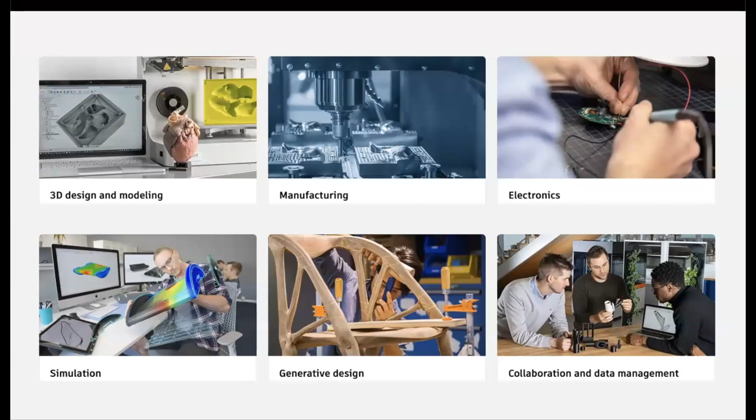A common question I get is why would we use Fusion, or why would I transition my students from Tinkercad to Fusion? That's a really great question. Fusion is a full-fledged professional, industry standard CAD program, meaning that the same types of careers your students might be entering one day, they can gain those skills in Fusion 360.

It is extremely real world. We talked last week about creating technical drawings, making complex 3D models, and getting into manufacturing as if we were considering an engineering career. So by teaching our students Fusion, we're really teaching them those real world skills at an earlier level and empowering them to create just about anything.

It's a really powerful program for students looking to enter these different fields as they learn all these different skills. It's so capable that they can bring their ideas to life as if it was a real product or system. One great way to do that is through Assemblies, which is tonight's theme.

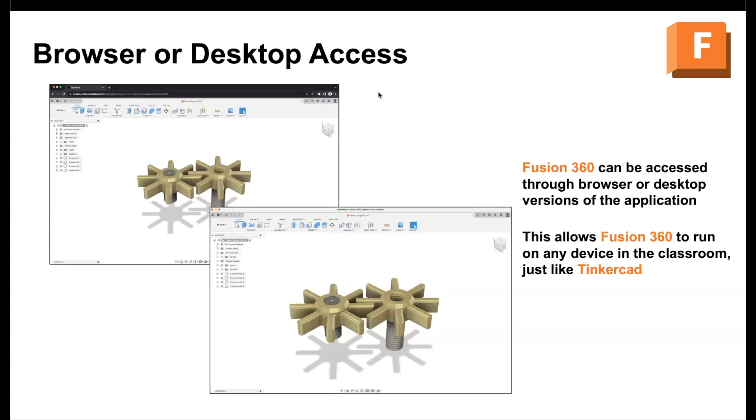I also want to answer a couple questions I see popping up. Yes, you can access Fusion in the browser, just like Tinkercad. There's a desktop app for Windows or Apple Mac computers, but you can also load Fusion in the Chrome browser on a Chromebook, just like you would with Tinkercad. So whatever device you have probably works with Fusion in your classroom. Fusion's also free for students and educators.

You do need to create an Autodesk account, but it's free to do that for education, which gives you unlimited access as an educator or for your students. There are different age limitations depending on where you are - for example, students would have to be 13 or older in the United States, and that varies a bit region to region, but it's completely free for students and educators to create an account and start working with Fusion.

There's also something called Fusion 360 Teams. This is cloud-based, meaning your students' designs are saved to a cloud. It also means it's super easy for you to make a class within Fusion Teams and have your students join that class so you can see their designs and check on their work. Students can share designs between group members and collaborate within a single document. It's very powerful in the classroom setting, and that's included with the account that you create.

Another common question, which I'll demonstrate when I get live and hands-on with Fusion, is that when you're getting started, the controls are slightly different if you're coming from Tinkercad to Fusion 360. But Fusion 360 is completely customizable - you can customize the way the mouse works, the way clicking works, the way selection and zooming works to mimic what you're familiar with in Tinkercad. That's something I know myself, and the whole Tinkercad team does, is the first thing that makes Fusion feel more like Tinkercad.

So it's a bit more comfortable for us to transition to this program. That's a super handy feature. I see Randy just dropped a blog post into the chat showing how to do that.

You'll notice that in the slideshow, there are some hyperlinks to different resources I'll be talking about throughout the night, so you'll be able to go back and review all these things as well.

So, designing multi-part assemblies, what does that actually mean? It's one thing to design a single part, like last webinar I was talking about designing a 3D printed mug or jar. But a more complex real-world design involves making parts that actually assemble, fit, lock together, rotate, and slide.

We love to use Fusion for this because not only can you make super complex designs, you can simulate how they would actually be constructed. We can see if they're going to move as they should, and we can test our models in Fusion 360, which brings in those real-world complex concepts.

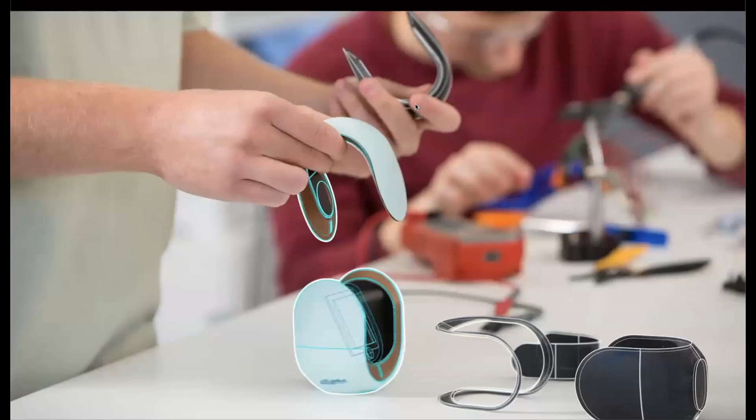That's exactly what we're going over in our demo tonight through a few different projects and scenarios. This will empower your students to plan and prototype their designs through an iterative process. Instead of just 3D printing and realizing it doesn't fit, we can do a lot of this testing in Fusion.

A real company would simulate everything digitally before they go and manufacture it. So it goes back to why Fusion lets us bring those real-world concepts right into the classroom.

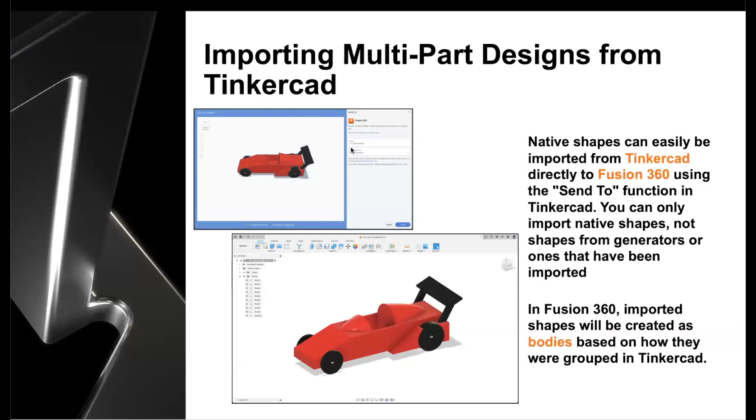The first thing I want to show you is how to actually start in Tinkercad, since so many of you from the poll are coming from Tinkercad. It's super easy and a lot of fun to bring your Tinkercad designs into Fusion 360.

What you're looking at right now is a toy car I have in my Tinkercad design. It's got multiple parts, and I want to show you how this is grouped together, because a lot of these things will import directly into Fusion, which is great.

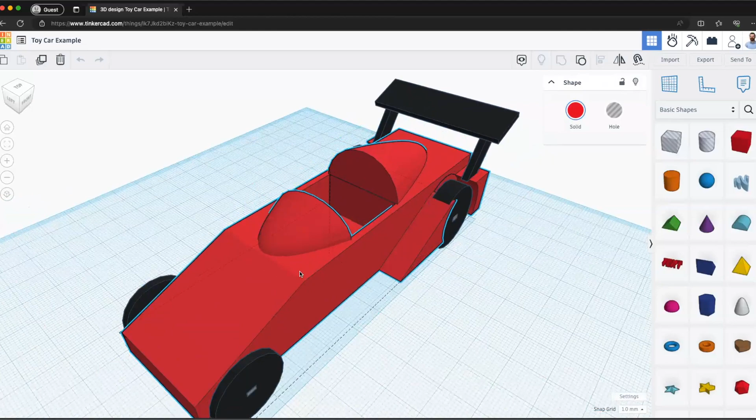This car body in red is a single part. This wheel and axle - the wheels are individual parts, the axle is an individual part, and this spoiler fin on the back is also an individual part. So I have multiple parts here that aren't grouped together, and that will be brought into Fusion just as I have it designed, colors and everything.

To bring something into Fusion is very easy to do. You can click the Send To button or the Export button - I believe there's a Fusion option under both. There's also a nice button to hit 'Take Your Design Further with Fusion 360.'

When you click on this, you'll have a number of options. First, keep in mind - and it does warn you about this - only native parts will be imported, meaning all of the basic shapes will be imported, including the scribble tool.

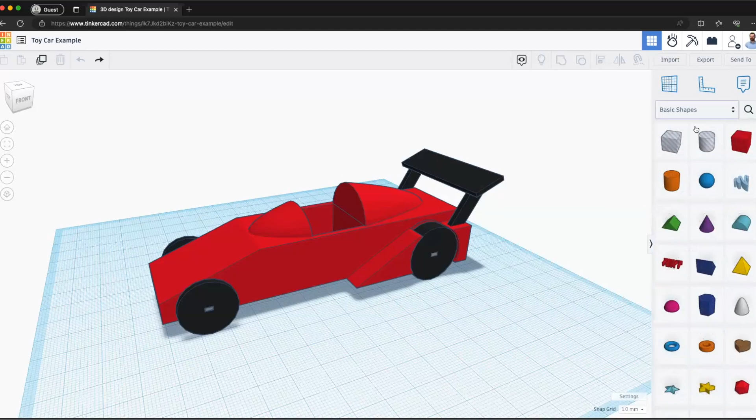But any shape generators or custom shapes cannot be brought into Fusion 360. You can bring in any basic shapes created with our basic panel, but other shapes will not be imported.

The other thing you might want to do is connect your Tinkercad and Fusion 360 account. I don't have a team listed for the account I'm signed in with now, but if I were a student part of your class, a Fusion 360 team would appear right here, and I could send it directly to that class.

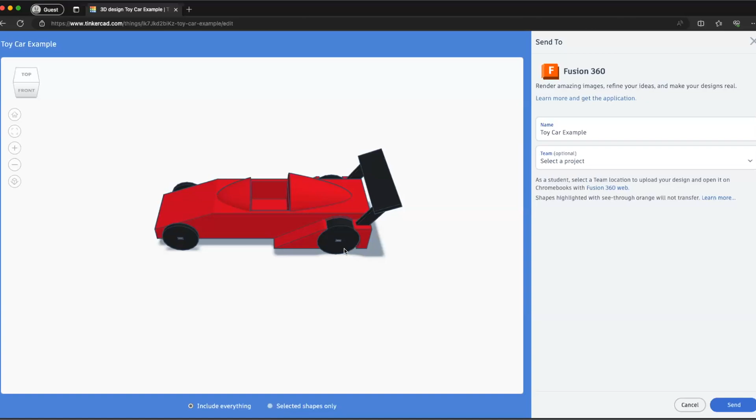Alternatively, I can download this and open it up directly in Fusion, and if I wanted to, I can export every single thing or only a selected shape. So if there were things in my design I didn't want to bring over, you have a lot of flexibility. Give me one moment, I'll show you as I bring up Fusion.

We have our toy car. It comes over exactly in terms of grouping as it was in Tinkercad, as well as colors - you can see it's still red, black, and gray. In Fusion, I have all of these bodies, and these bodies are those parts.

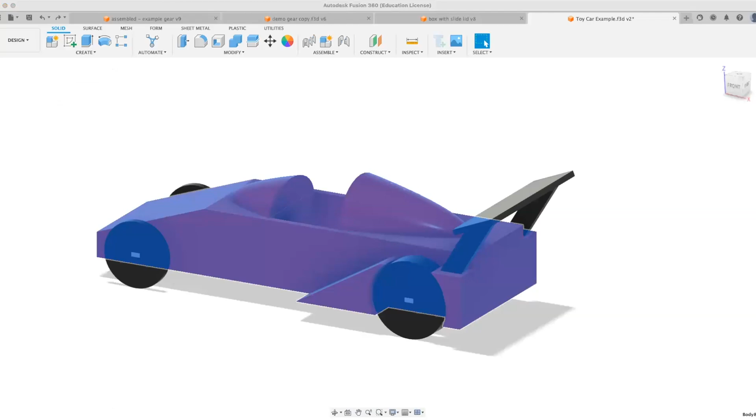So you can notice I can click on these different bodies here, and I can highlight the individual parts. So whatever wasn't grouped or was grouped came over as solid parts in Fusion, which is really cool. And there's another couple great things, and we talked about this in our last webinar about why you might want to bring your designs into Fusion.

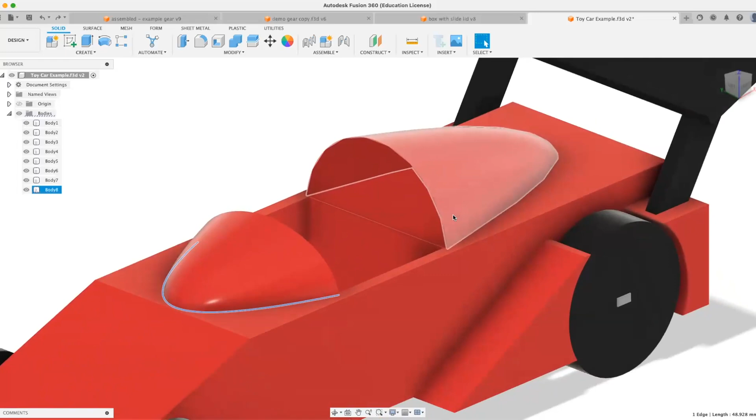You'll notice that this design automatically looks a little bit smoother, right? So our mesh models are merged into solid shapes, which means I can actually click on edges of my design. Everything's a bit smoother and a bit more refined just because I brought it into Fusion 360, which kind of automatically reconfigures and re-renders all of your parts. So it makes it nice and smooth. And it gives you some really great customizability features.

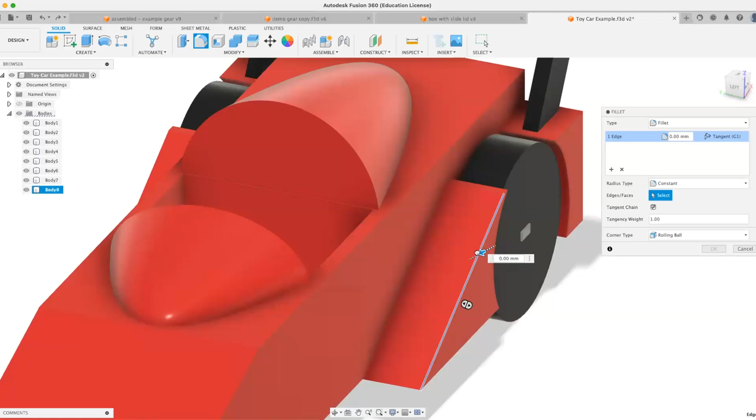Like, for example, if I wanted to get rid of some of these rough edges, I could just grab my fillet tool and I could click on an edge here and round it over and enhance my design as I go. And I can actually do that to a number of edges. Let me click on some edges here, and I can customize my car a little bit.

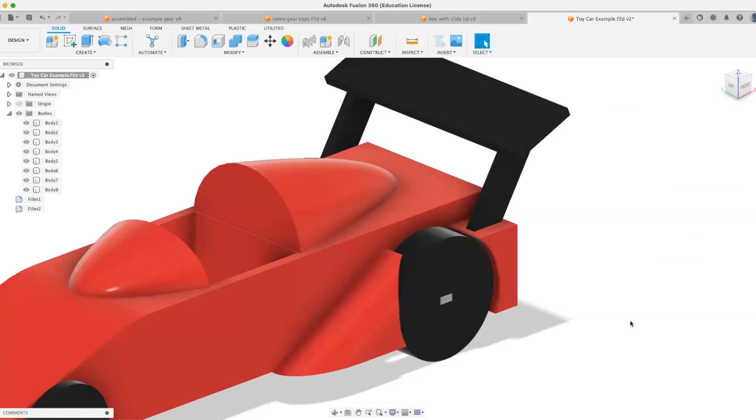Maybe we'll click on this edge and just sort of smooth things over as I want to enhance my design that I brought over. So this car was designed in Tinkercad, but I can work with Fusion 360 to customize it, enhance it, and of course work with assemblies. So lots of really great features just by importing your design over here, which is super cool.

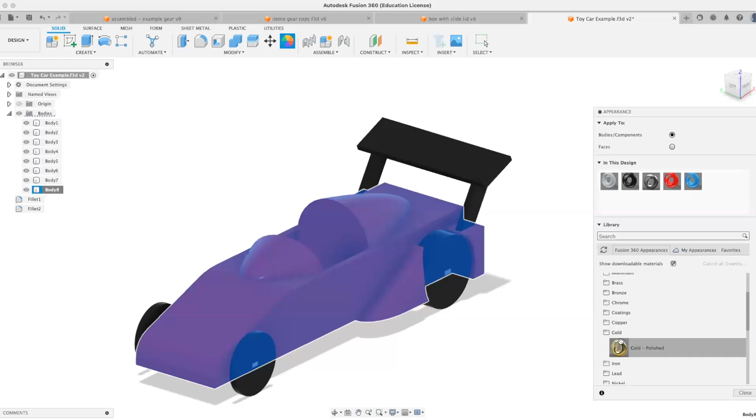I mentioned that you can also customize and change colors and things. So all of these shapes that we have can be customized. So for example, if I find my car body shape, I can right click this and I can edit the appearance. And Fusion has a number of materials kind of built in. So for example, I might want to actually go to my metal category and maybe go to gold and set my car to be gold, which is of course super fun.

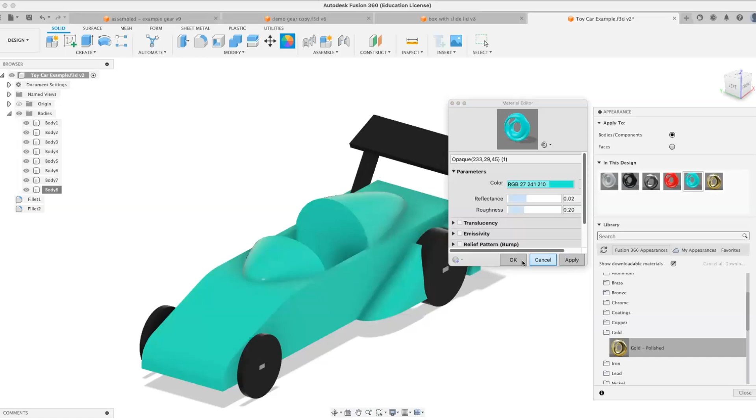Or I can actually get very specific as I mix my colors and things. So you have a lot of customizability in how you actually want to make your models appear in Fusion as well, which is also super fun. So lots of great customizability as you bring your models in.

Now, when you bring a Tinkercad design in, this timeline isn't shown by default, but we can actually right-click our model up here in the browser and click Design, Capture Design History. And that means that everything I do moving forward will show on my timeline. And the benefit of that is it's super easy for me to modify and go back and adjust things. So let me add, for example, a chamfer on the outer edges of my wheels real quick.

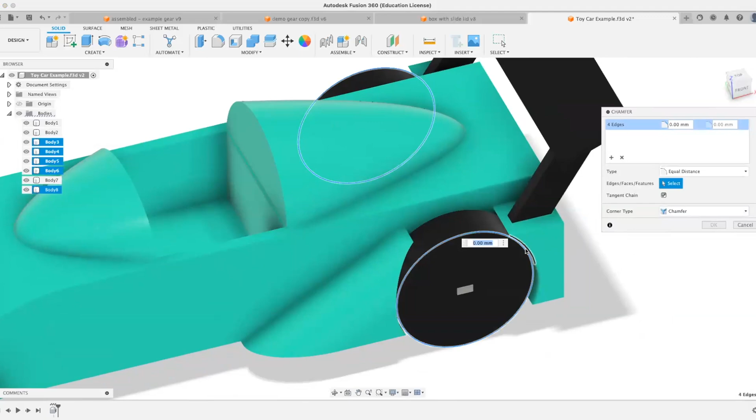Now that I've captured my timeline, you'll see that the changes that I do, like this, now appear down here. So I have this little chamfer icon. And if I wanted to go back and adjust this chamfer, let's say, for example, I don't want it to be 2 millimeters, I want to change it to 1 millimeter, I can just double click on anything within my timeline, make a change, and it'll automatically update my model.

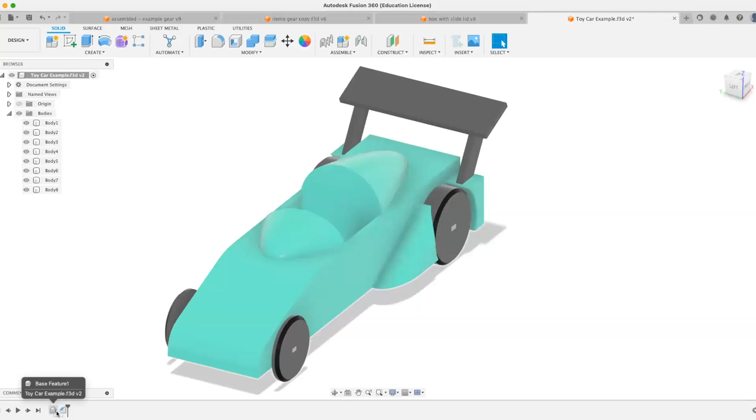So if you make a brand new design in Fusion, that's automatically going to be there. But if you bring something in from Tinkercad, we can import our timeline just to make customizing and adjusting our model a little bit more fluid.

Something else we should do, especially when we're getting into assemblies, is naming our bodies. So later on, we're going to be grouping parts of the car together and making it roll and do all of these really exciting things. But it's really hard for me to know, all right, what is my front right wheel? I kind of have to hover over these bodies to figure this out.

So I always recommend that when you're making a complex assembly, name your bodies. Whatever works for you. So I don't always do the most spell-checked names per se, but I like to know what I'm working with.

So that way, as I try to group things together, it's a little bit easier for me to do. And this is going to really benefit your students in the long run as they're designing complex models, because if they want to hide something or group something, it's super easy to do.

I'm sorry, it's kind of hard for me to type and spell check myself and talk at the same time.

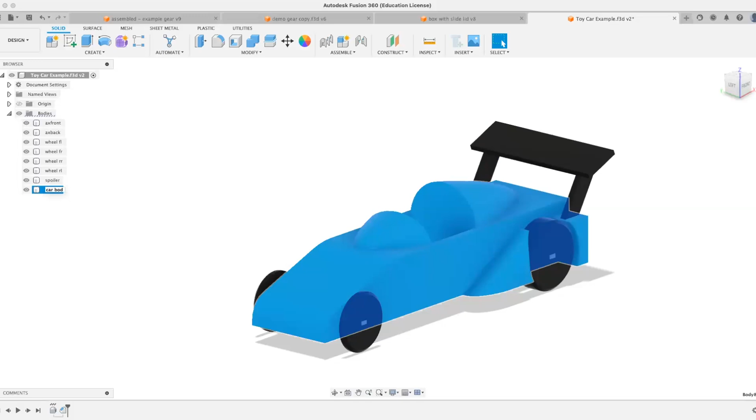Here we go. Spoiler, and then this is just our car body. So let's say, for example, I wanted to inspect my front axle. I now know what my wheels are, and I can easily hit these little eyeballs right here and hide those parts. And it just gives me a little bit more control over my models. And if you're designing a single part, that's not super important. But once we get into complex assemblies, the more organized we can be, the better and the more successful it will be in the long run.

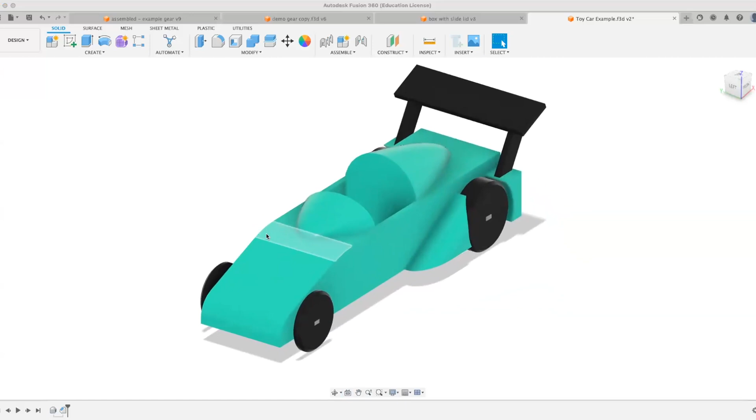Something else that's super important with Fusion is also creating what's called components. So a component is essentially an independent part. I have independent bodies right now, but they're all within my toy car part. So let's say, for example, I wanted to adjust just this wheel. If I wanted to move this wheel or rotate just one wheel, I can't necessarily do that right now. But if these were independent components, I can adjust them and manipulate them and work with them individually.

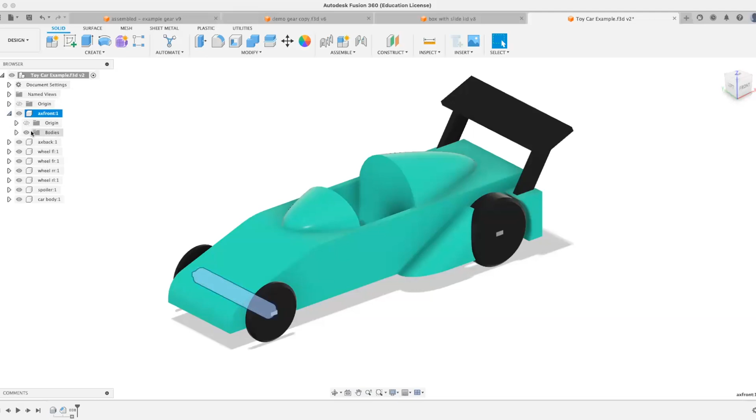And you can right-click any body and turn it into a component one at a time. Or if I right-click my whole bodies folder, I can create components from all of my bodies. And you'll notice my browser just changed a little bit. I still have the same names, so all the names transferred, but each part now has its own little sub menu of features and bodies and things like that. And why is that beneficial? Well, let's say, for example, I just want to move this one wheel. Now I can. These parts now roam freely, so I can move them around individually.

And obviously, this is kind of more similar to Tinkercad. You can envision that every shape is its own component initially, because you can drag it and manipulate it, right? So in Fusion, by turning these into components, we have these individual parts, which we can assemble together, but we can also now manipulate and drag around freely. And that's a super important thing as we start to get into more complex models and assemblies.

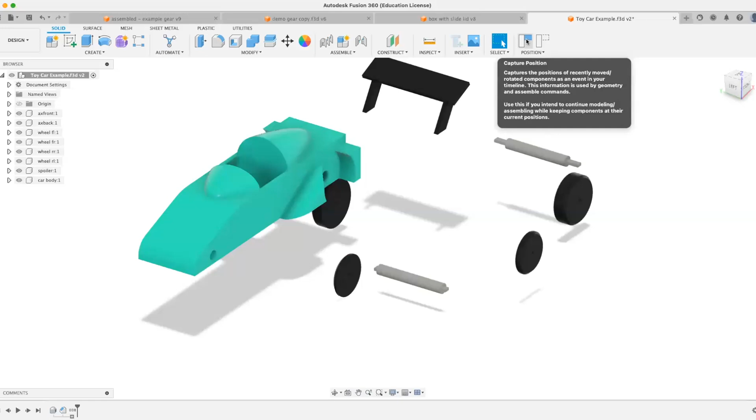And if you disassemble your car or your part or your model like I did, and you want to put it all back, you'll notice that I have this nice little position button here. Capture position will save this position as my new home base, so it'll keep all my parts exploded like this. Revert position will take me back to where it was before I started dragging things. So if I'm just designing something and I need to quickly move this wheel out of the way, I can do that and I can revert it back. But as I already showed you, you can also just hide components in the browser. So you have a lot of customizability.

And you might notice that my toolbar looks slightly different than yours. Fusion, as I mentioned, is completely customizable. So let's say that there's a tool that you use a lot. For example, one of my favorite tools is change parameters. You can add things to your toolbar. So I can pin tools to my toolbar. I can remove things from my toolbar.

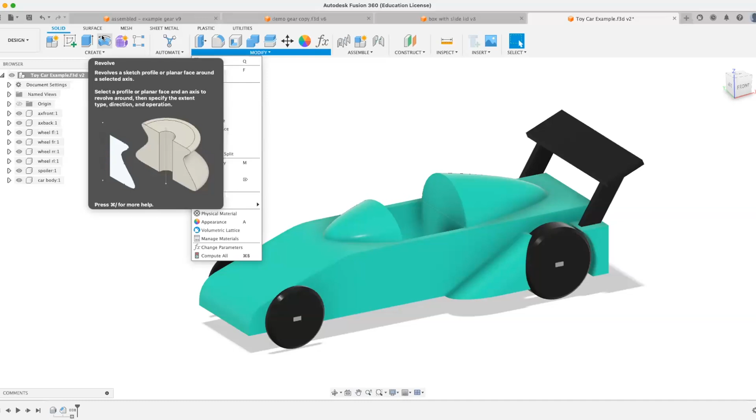And as a teacher, I always like to figure out what the tools I'm going to use in my class are initially. And then the first day in Fusion, we run through it with my students together. We set up our toolbar. We grab the tools that are most important that we're going to use and want to highlight. We customize our toolbar as well as our Zoom settings and things like that, which we talked about earlier. So lots of really great ways to customize your Fusion experience and your toolbar as you're working.

Now, I mentioned parameters briefly, and I want to dive into that a little bit deeper. A parameter is kind of like a variable, or it is a variable, I guess I should say. So I'm going to click on this change parameters button. And again, it's on my toolbar, but this is under the modify tab. We have change parameters. And what this allows you to do is create variables, which you can call upon. For example, let's say that I was going to set the length of something the same many, many times. I might call that length 1.

And every time I want to set a measurement, I don't have to know what that number is. I can just say, hey, set that to be length 1.

One thing that I always like to do is create a tolerance for moving parts. So let's say, for example, I really was going to make this car and I want my axles to roll within my car body. I do have holes here. So if I drag this axle out of the way, you can see that there's a hole, but the hole size is the exact same size as my axle. So if I was actually going to 3D print this, that would bind. That would be really, really tight. And it wouldn't actually spin.

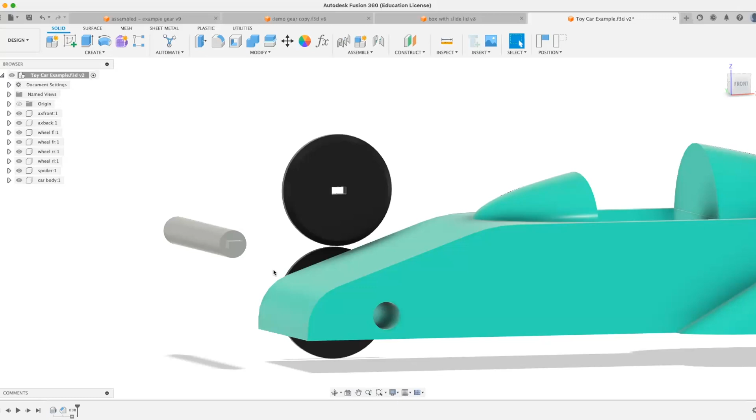It wouldn't actually roll. So I like to create a parameter for tolerances to add wiggle room for my moving parts. And then that way, whenever my students are designing, let's say they set something to be 20 millimeters, but they want it to be a moving part, they can just say 20 millimeters plus tolerance. And it's going to allow them to more easily create some flexibility in their models. So let me show you how to do that.

I'm going to open up this change parameters, and I'm going to make a new parameter called tolerance. And I'm going to set this to be half a millimeter, so 0.5 millimeters. And I can even call this like loose fit for 3D printing, and mind my spelling.

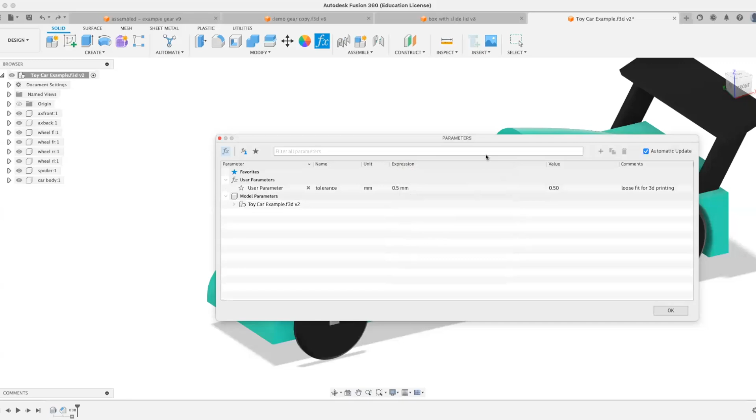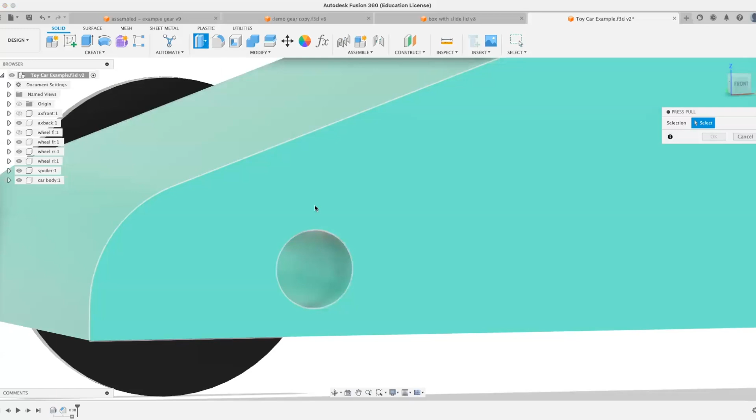Now, if I wanted to go set a dimension for something, like for example, let's hide my front wheel and let's hide my front axle. Let's say that I actually want to add some wiggle room. I want to widen this hole here with my tolerance. Well, I could use, let's say, the press pull command or tool, and you can see that I can change the size of this hole and I can set like a specific measurement.

But now that I've created the variable called tolerance, I can just type in the word tolerance and it's automatically going to add or adjust. And we can see that it just added tolerance. In this case, I actually want to remove tolerance. I want to make this slightly bigger, so I can actually even type in negative tolerance. And maybe to show you what I'm talking about, I'm going to bring my axle back. And you can now see that there's a gap all the way around my axle, which is super cool. So that would actually allow this to roll.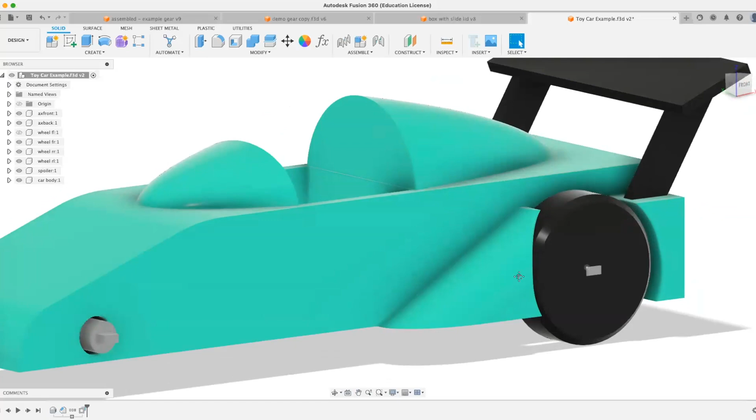And I mentioned one really intentional way to use this is if you're going to use this measurement over and over again. So let's now go to the back axle. And I'm going to, again, do a press pull command. And I'm going to say negative tolerance. And that's going to add the wiggle room to my rear axle as well.

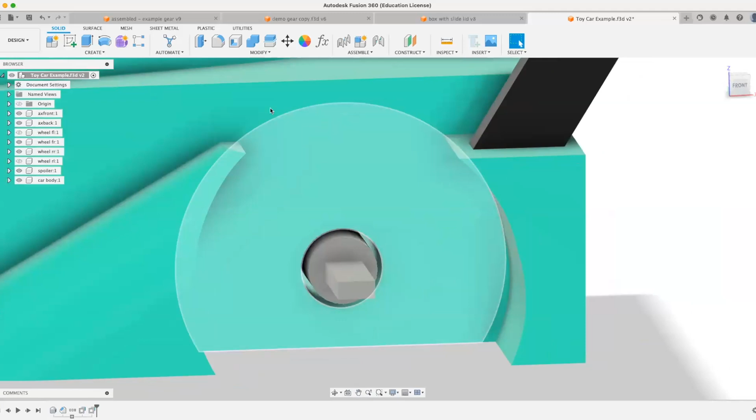But here's something super cool. Let's say I change my mind. I don't want this to be half a millimeter. I can just go in and adjust my measurement here. And let's say I want this to be 0.25 millimeters. It will actually update everywhere I use that variable.

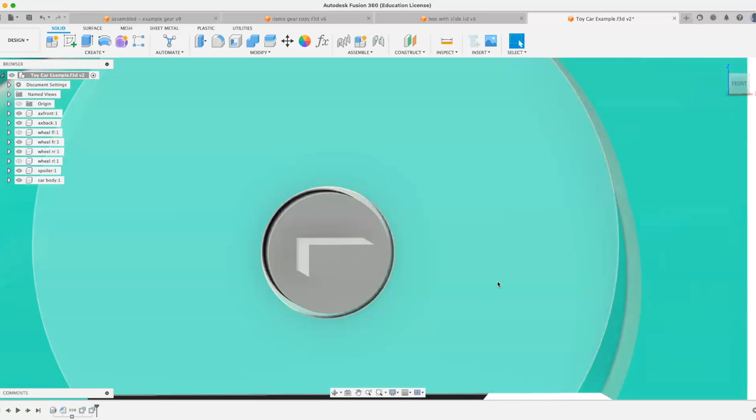So I don't know if you can see, because that wasn't a huge change. Let me make this a really big change. Let's make this 2 millimeters. And you can see that my hole size just increased a lot. I didn't change that at all. So that's just now adjusting everywhere where I put this tolerance variable.

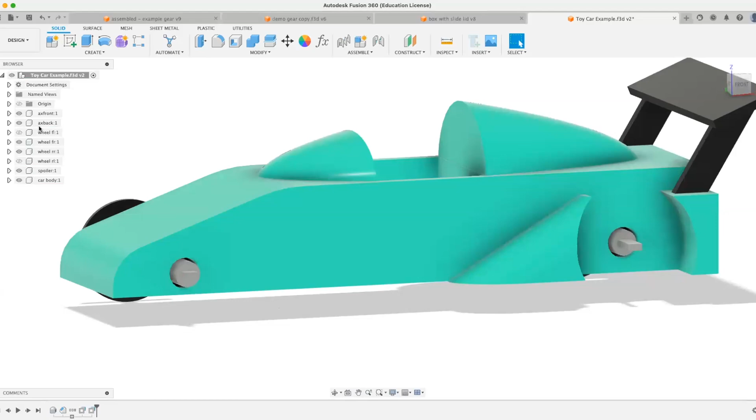It's automatically adjusting. And now let's imagine that you're 3D printing with your students. If you're 3D printing with one filament, that might shrink at a different rate than another filament. So you might have a tolerance that's adjusted based on how you're building this or whatever it might be. So this is a really powerful tool as you are working with your designs and your assemblies by creating parameters. So I'm going to set that back to half a millimeter, give us a little bit of wiggle room with our axles here. And then I'm going to just bring my car kind of back.

If you're coming from Tinkercad, you'll notice you kind of have your view cube here. So you can rotate and orbit around, super handy. And then you also have a bunch of different tools at the bottom of your screen to pan, zoom, etc. I am right now right-clicking and dragging and zooming in, just like I would be doing in Tinkercad, because I've adjusted my screen like Tinkercad here, as we talked about earlier.

So now that we've kind of considered components, tolerances, changing component positions and things, let's talk more about assemblies. And at the moment, I'm working with a model where the parts were brought in kind of pre-assembled, right?

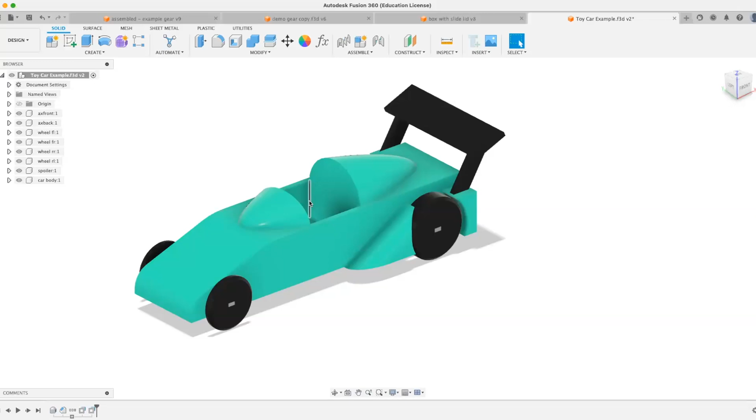In Tinkercad, I aligned this to be how I wanted it to be. But in Fusion, you have a number of ways to move things around. If it's a component, as I showed you, you can just literally drag this anywhere you want it to be. But this is sort of a loose drag, right? I can literally put it anywhere, even if it's somewhere wrong, like in the middle of my car. So you can accidentally put something in the wrong spot. So there are more precise ways to move things around.

We have the Move Copy tool, which if I click on my part, I can actually click on any specific origin point. So for example, I want to move my part specifically from this face, and I can move things more accurately. So for example, I can move this exactly 30 millimeters away in the Z direction based on how I'm currently oriented or whatever it might be. So this gives you a little bit more control as you move things.

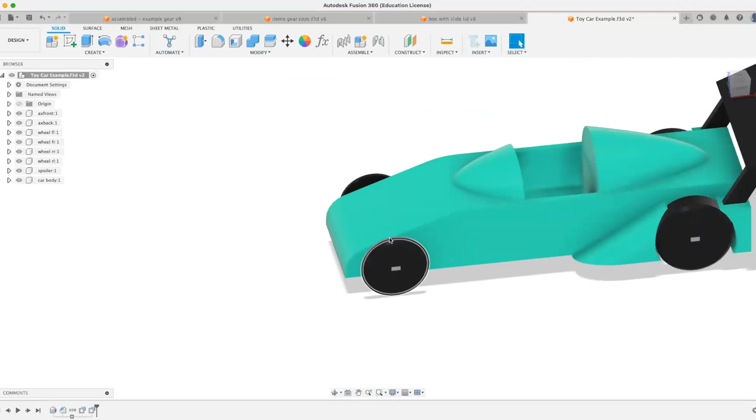This is also a great way to make a copy of something too. Let's say I wanted a copy of my wheel. I could actually click on this wheel and hit create copy. And now when I move it, it's actually going to make a copy when I move. So that's another little handy trick for moving things around.

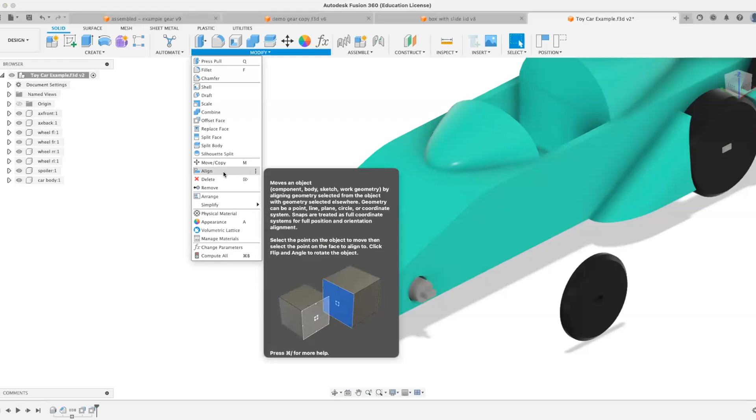And then there's also an align tool as well. And the align tool is sort of like an assembly that isn't permanently constrained. So what I mean by that is I'm going to hit the align tool, and I'm going to say that I want this face to snap to this face. And you can see, while it's not aligned centered per se, it is now aligned perpendicularly to my face. Let me actually kind of go back here.

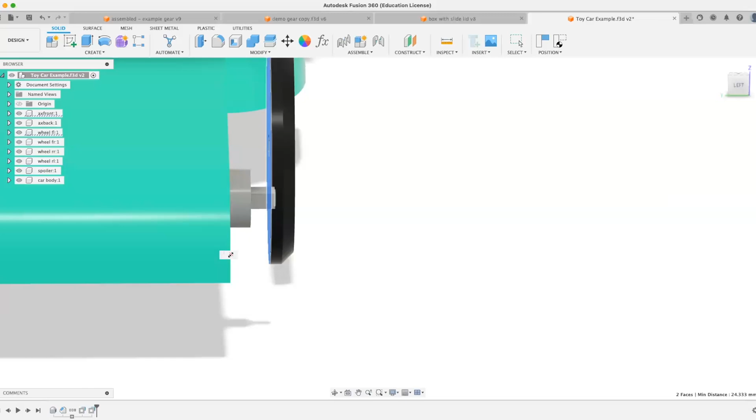And let me say instead, I want to align this inside face to this face. And then I might also want to align this face to this face, and work my way around little by little to actually snap models. And you can see that this might not be the smoothest way to do this, but it is a little bit more accurate than just trying to drag something and get it perfectly in place like that.

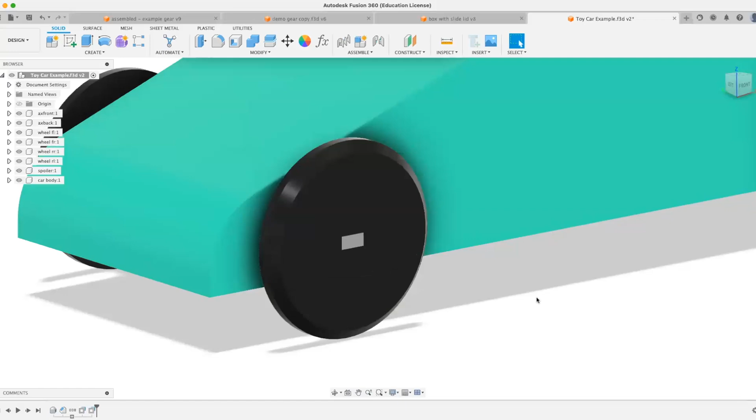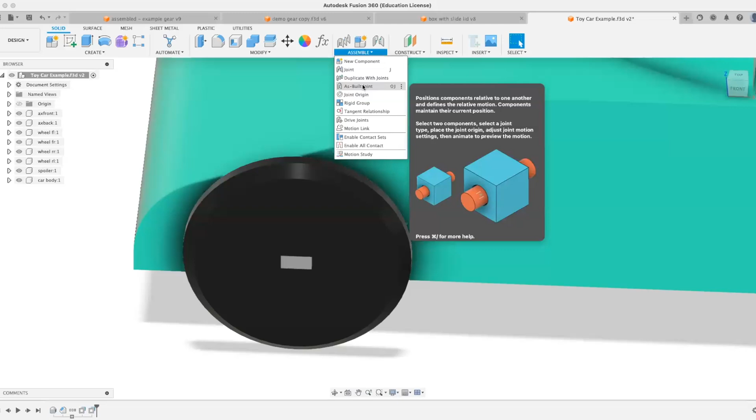But I mentioned that this isn't a constrained assembly. And what I mean by that is it's not necessarily like a joint or something that we can apply motion to. That is a little bit different. So if we look under our assemble menu, we have joints, we have as-built joints, we have rigid groups. These are actual constraints and relationships between components, meaning that if one moves, another kind of moves with it. They're linked together. It's not just the placement of where they are on the screen. They actually interact with one another. And if we want to get into creating things that can simulate motion and simulate assemblies, we're really working in this assembly menu here.

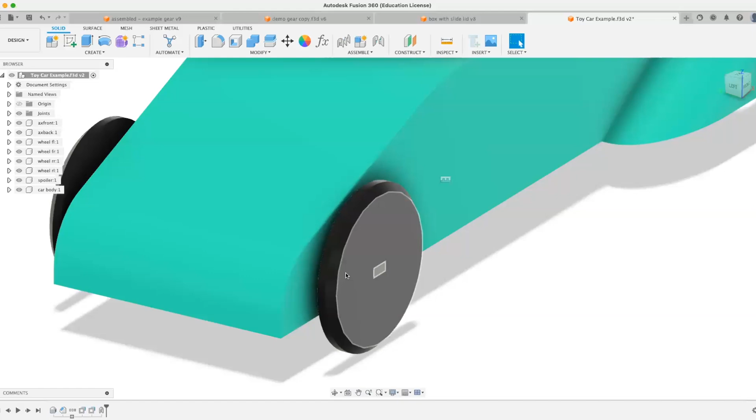Now, the first thing I like to do is group everything together that moves together. So I want this front axle and these two front wheels to be grouped together. I want them to move together. And I have two ways to do this. I can create an as-built joint because they're already in the position they need to be. So I can click on this component and this component, and I can say that this is a rigid joint. And what that's going to do is anytime one moves, the other moves with it. So if I now drag my wheel, you can see that the axle is coming with it. So that's a rigid joint, things that move together in unison.

And you'll notice that a new folder appeared in my browser called joints. So if I ever want to go back and adjust a joint that I created, I can actually edit it from my browser, change things around. Everything kind of appears here as we adjust it.

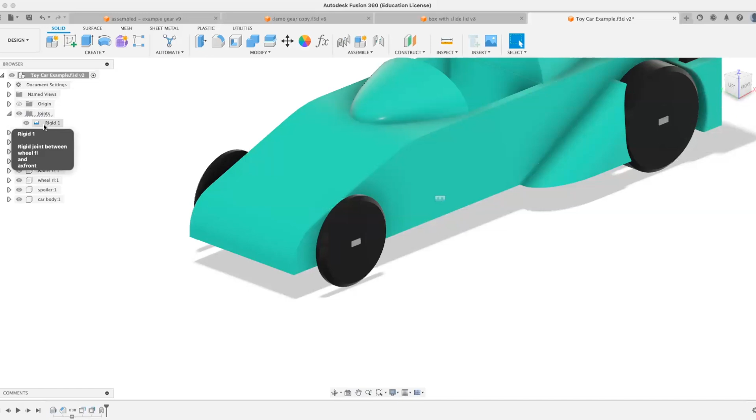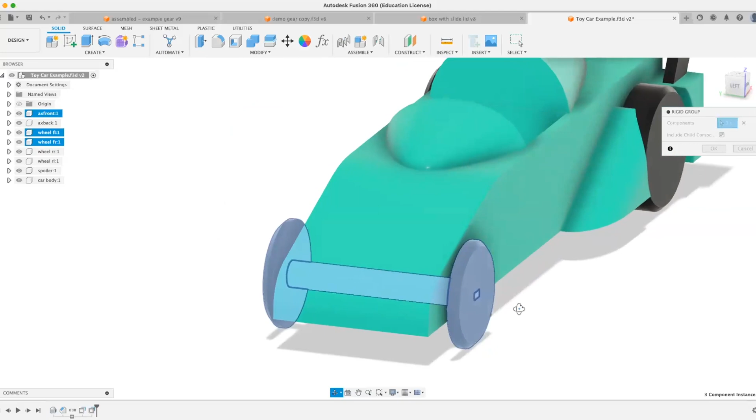But I actually like to create rigid groups instead of rigid joints because it gives you a little bit more control in terms of how many components you can select. So a rigid group is automatically going to be set to be rigid, meaning that these things will move together in unison. And I can select more than just two components. So what I'm doing right now is I'm making a rigid group between my front axle and my two front wheels. And I can click OK. And now this whole front subsystem of my model is a group that moves together. And I can actually rename this if I wanted to. So I could call this like front drive, because that's my front drive system.

I'm going to make another rigid group with my rear drive system. So we'll go rear axle. Oops, I accidentally clicked on my car by mistake. Here we go. Rear axle, wheel, and wheel. Click OK. And we're going to call this our rear drive. And right now the spoiler is a separate part from the car body. So I'm also going to make a rigid group just called car.

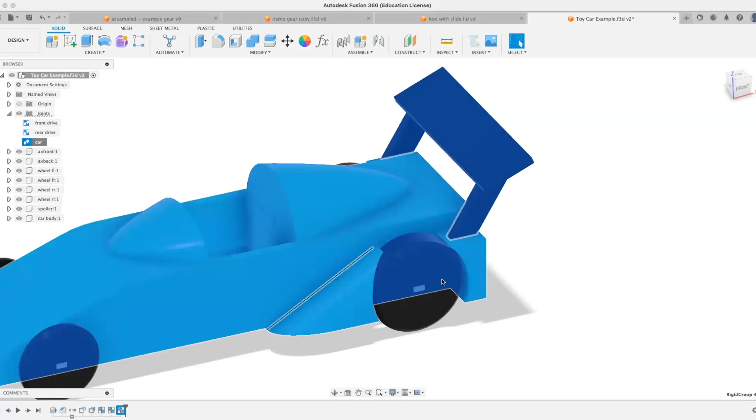And you want to make groups and assign constraints with everything, because what you might find is if you don't assign something as a group, or if you don't set it to be rigid or not, all of a sudden one thing will move and the one thing won't move like you expect it. So as you're looking at your model, you want to assign these constraints to all of your parts, all of your components, to whatever they're supposed to do. If they're supposed to move, set them as motion. If they're not supposed to move, set them as a rigid or a grounded component to make sure that everything kind of interacts as it's sort of supposed to in the real world.

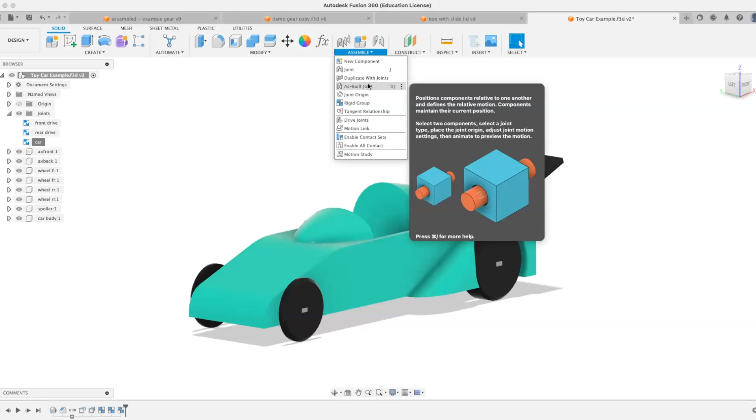Now, I want to go back to this as-built joint menu that I opened before. Again, as-built joints are when you already have your models in place. And I'll show you what if your models aren't in place in a moment. But at the moment, this car, everything's in place. It's where I want it to be. I just want to add my relationships and how they interact. So I'm going to hit my as-built joints. And we're going to select my axle. So I'm going to hide my wheel.

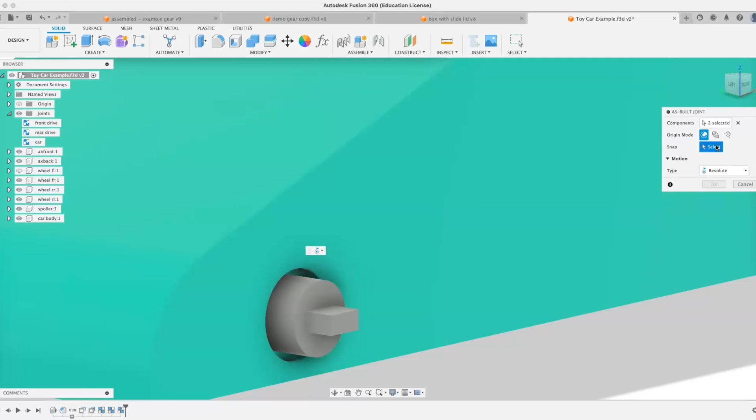And I'm going to select my car. But this isn't going to be rigid. I'm going to set a revolute motion. And I also need to select a snap point, meaning like, what is my revolve point? How is this going to revolve? And I'm going to select the outer edge of the hole that the axle slides through. And I can click this little preview motion here, and you can see that my axle is now spinning as it should be. And I can change the direction that it's spinning and set different parameters and things like that if I need to customize this, and we'll dive into that in just a moment.

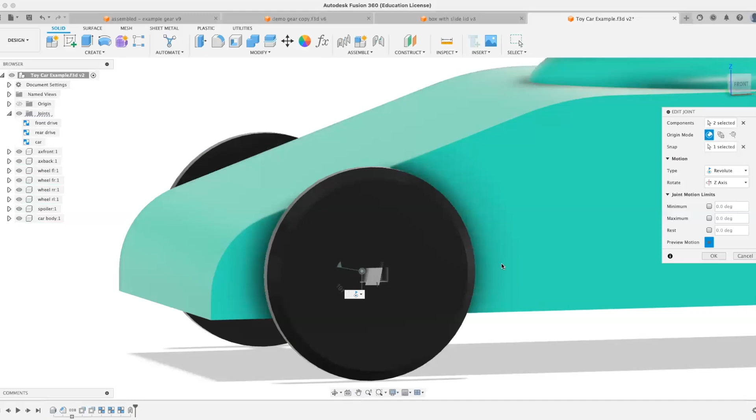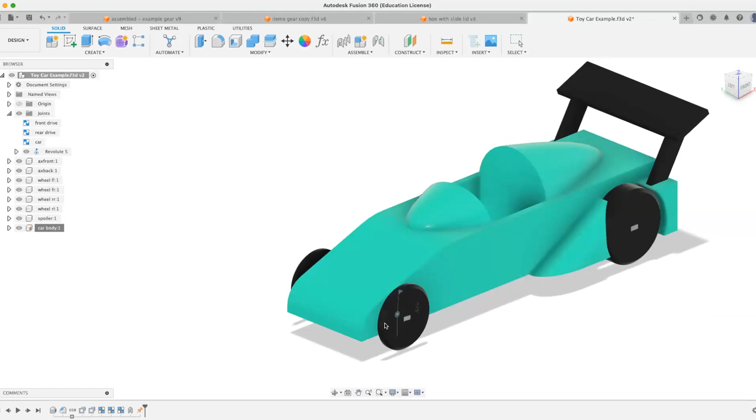And if I bring my wheel back here, I can, let's see, go back into my motion and preview this, and we'll see that, oops, sorry, hang on, let me ground my car here. See if this works. And I should be able to drag this. So I can just drag my wheel. And what's happening is you'll notice that both wheels are moving and the axle's moving. This whole rigid group is moving together as I drag this.

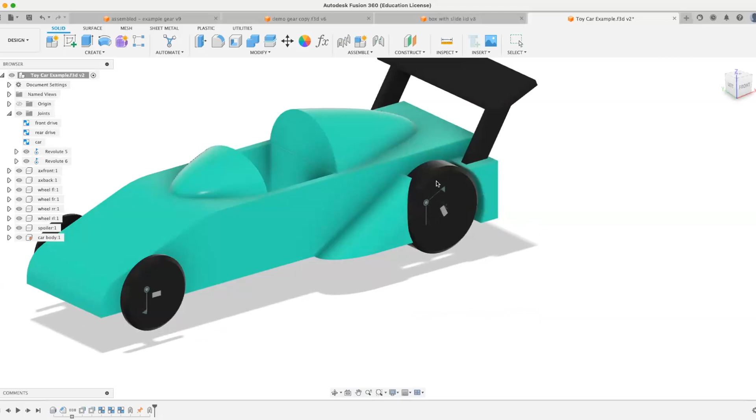Now let's add this to our rear group as well. So I'm going to make another as-built joint. And I'm just going to hide this back wheel so I can see my parts. I want my axle, my car, and the snap point again is going to be the axle hole, like so. Okay. So now if I bring my wheel back, I should be able to drag this. Great.

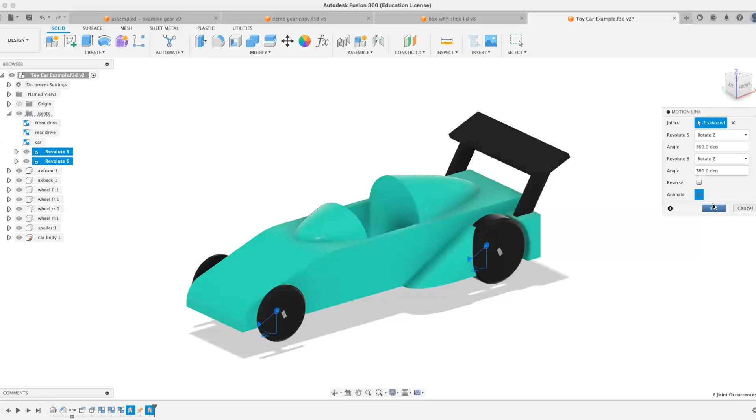And something else I can do is I can link these together. We know that in the real world, if this car was rolling, when the front wheel rolls, the back wheel should roll, in theory, if this was rolling down a hill. So I can actually create what's called a motion link, which is saying that, okay, when this joint spins, this one should also spin. So now my wheels are going to roll together. And I think this is rolling backwards, but I can make this roll forwards or whatever it is that I want to do, and also set my angle and degrees. But I can now drag this front wheel around and see my back wheels spin as well. So we have these nice little as-built joints and our motion links, so we can kind of see how that works.

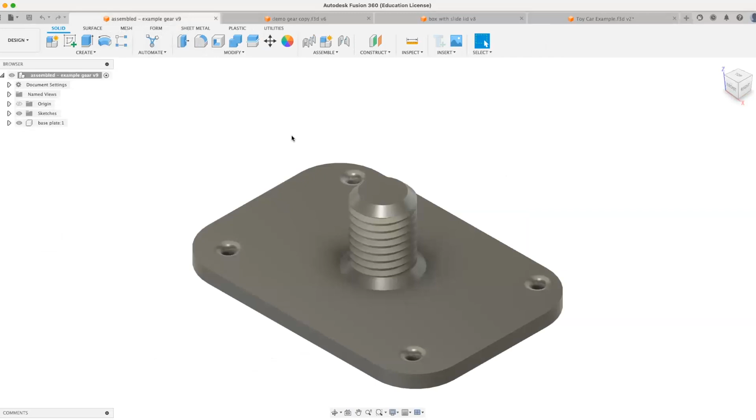Now, you'll notice that under this menu, there's also the joint, right? So as-built joints, again, is if your parts are already in place. If you've designed this to be in place, you can use the as-built joints. But what if I have parts that are not in place? So for example, here is a gear plate or some type of threaded plate of whatever it might be. Okay, base plate is what my part's called. And in another Fusion document, I have a gear. So what if I want to bring these two documents together?

What if I want to bring this gear, I'm calling it a gear, but I guess it might be a tap or something like that, if I want to bring this part into my other one. Well, I'm going to right-click my component and hit copy. And then I'm going to head on over to this document and hit paste. And now I have my gear part.

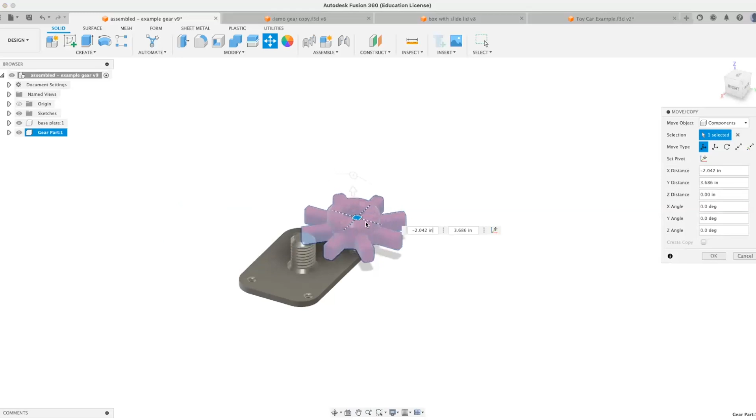When I bring this in, I'm automatically shown the move window, so I can position this loosely wherever I might want it to go as I bring these parts together. But let me show you what this joint feature does.

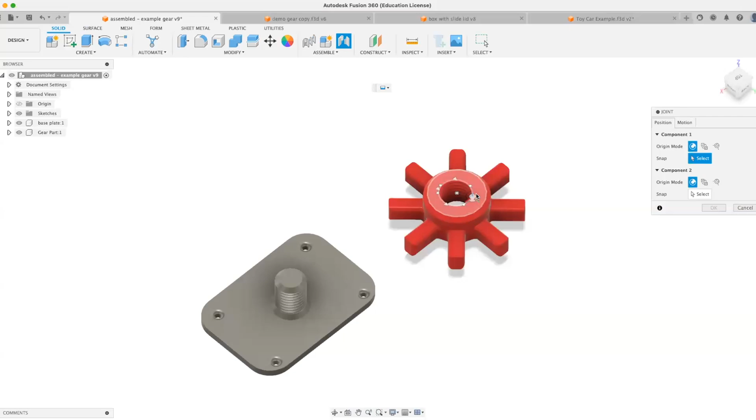With joints, I can make parts not only have constraints in terms of motion, but also move into position. For example, I want the top of my post to be centered here, from the center of my post to the center of my gear to be aligned. You'll notice this now not only gives me options for motion, like revolving, it also moved things into position.

I want to recap that because when I first got started with this, I would always click joints and say, wait, why are things moving away from where I want? So if your parts aren't where you want them to be, you can use a joint, which moves things where they should be, as well as allows you to set them to be rigid, motion, etc.

If your parts are already where you want them to be, so you design your model with your parts in place, then you want to use the as-built joints so you can apply the motion without needing to move them. But Fusion gives you the capability to assemble things based on however it is that you design them, which is super cool.

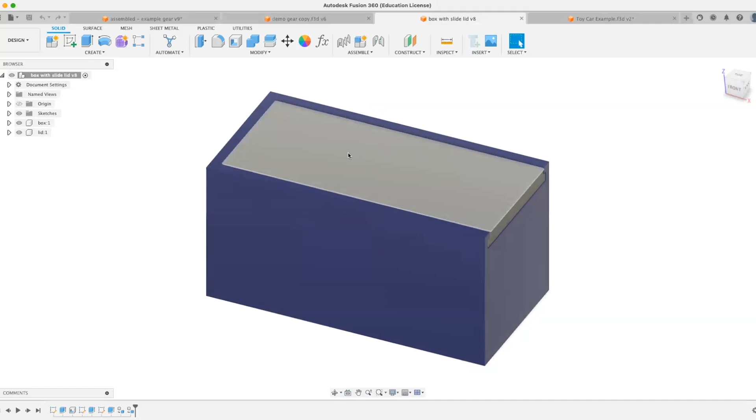Something else you can do is set limits with your parts. So I have this slide box, as you can see, and I have this lid which, let me move it out of the way, fits within my box. I also have our tolerance variable that we talked about earlier.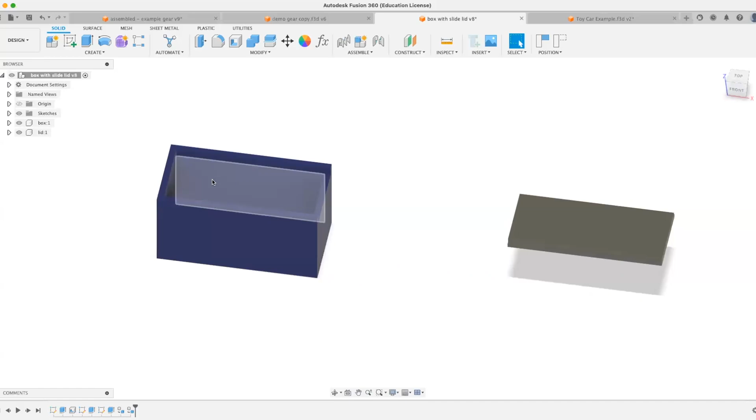But I know that this lid, in theory, should not come all the way over here. I want to just see this slide within its track. I also know that the lid can't come through the back of the box. I know that because I designed this part, but Fusion doesn't know that. I need to teach Fusion what the limits are of this assembly.

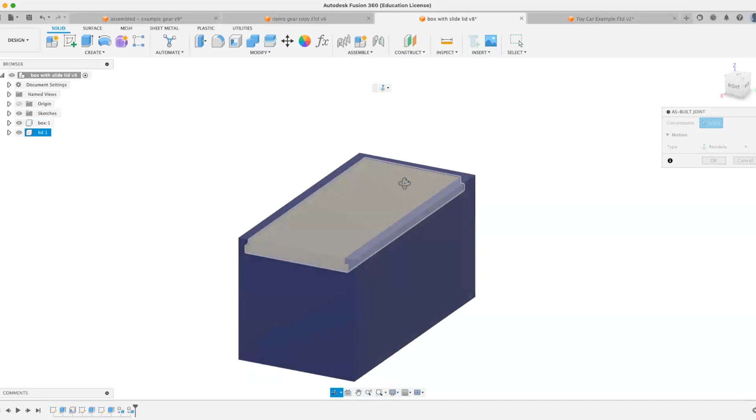So we're going to do another as-built joint because these parts are already where I want them to be. I have my lid component and my box component, and you'll notice right now I'm on Revolute, which is going to look super weird and wrong because it's actually saying I can't revolve around that. We're going to change this to a slider, and I'm going to say I'm going to slide along this axis.

As you can see, this is super cool, my lid is sliding, which is great. But it's also not sliding how it would be in the real world. That's not what we want to do. So I'm actually going to set my limits.

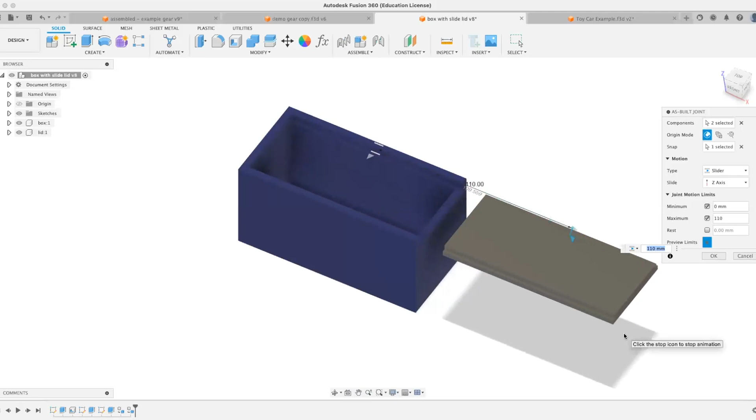I'm going to set my minimum of 0 and a maximum of 110. This model now acts sort of like it should in the real world. My lid isn't going off the back of my box, it is constrained as the part would be.

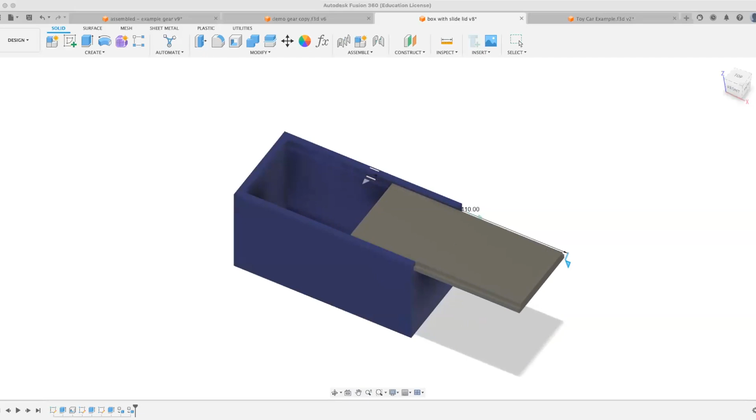While it took a little bit of effort to do, it's important because by default, Fusion doesn't know what the rules are for these parts. It doesn't know that it's a wheel and axle, doesn't know it's a lid and a box or the features. So when we create our joints and constraints, these are parameters that we as designers need to go ahead and set, which is hugely important as we work with our assemblies.

Let me recap a couple important things before we go into our review and Q&A. We have a lot of different flexibility with designing in Fusion, whether you want to bring a model in from Tinkercad or design something completely from scratch in Fusion. That obviously caters to what your students are doing, how they're already learning. If they're learning in Tinkercad, you want to bring them into Fusion.

One great way is to start in Tinkercad and literally import your models, like my toy car, but then show them how they can enhance their designs through adding different fillets, chamfers, and features. Once we get into assembly, before we can assemble, we need to make sure we have our components. That is one step a lot of folks miss in the beginning—you can't just have bodies.

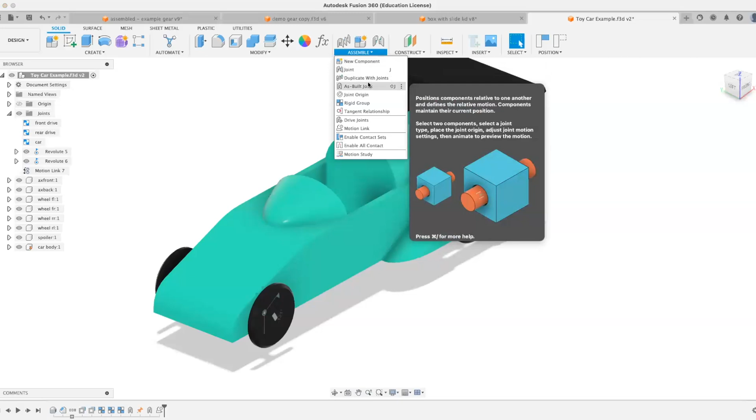We need to make sure that we have components that can be manipulated so we can set constraints and things like that. Once we have those components, then we can create joints, whether we want to move things in place or as-built joints. That allows us to create motion simulation, and you can go back and review and preview your motion as you designed it, which is super cool. You can actually see how things would sort of interact.

I want to end with a couple things going ahead here. I saw some folks ask about separating and 3D printing these components. We talked about that in our first webinar, but that's a great question. If you create an assembly like this, and then I want to go ahead and 3D print this car, I can't 3D print it in a full assembly like this. So what might I do?

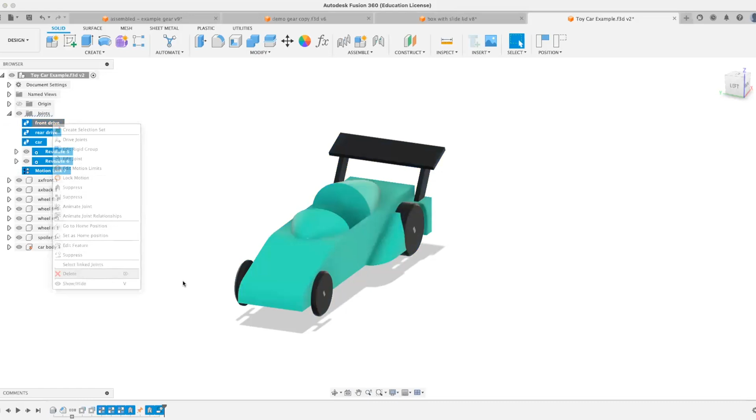Personally, I would save this as a second design, as a copy. In my copy, I would delete my joints. If I wanted to construct my joints and simulate, that's fine. But if I wanted to 3D print this, I would want the components to be able to be moved and dragged. I would click on my components and find the best angle to lay these flat for 3D printing or whatever I might need to do. So you don't necessarily want to do this assembly if you plan on taking these models apart.

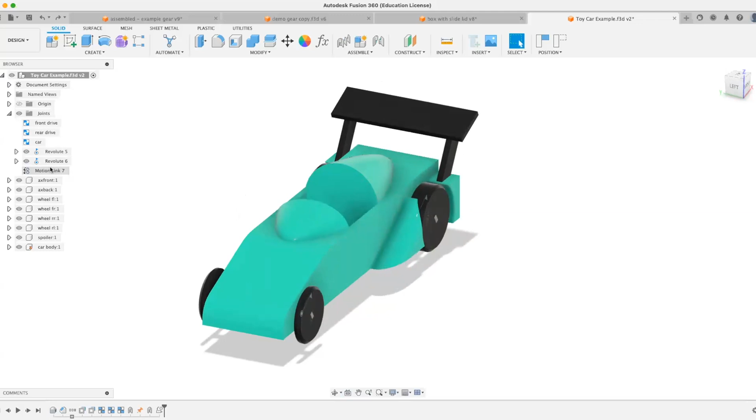Something else you can do, if you don't want to delete them or make a copy, is suppress these features. For example, if I right click on all these joints and hit suppress, that should disable them without deleting them, meaning even though they're still here, they're no longer active. So I can click on my components and move them around to arrange these for 3D printing or manufacturing as you go.

So two different features, right? If we want to make a model to see how it would interact, we want to do these assemblies, constraints, joints and things like that. If we want to separate these and 3D print them in multiple parts, you wouldn't necessarily need those joints and constraints.

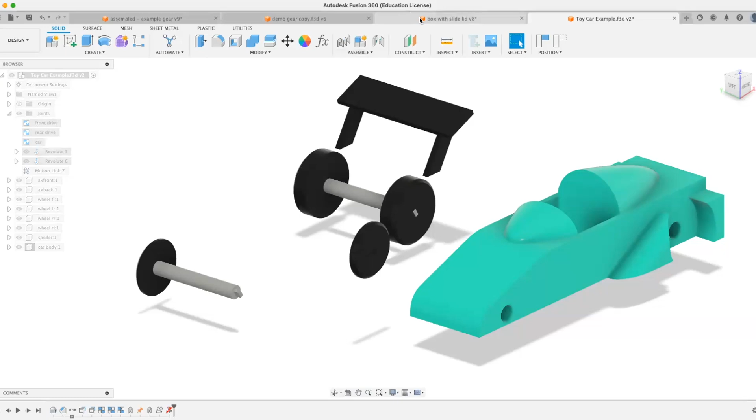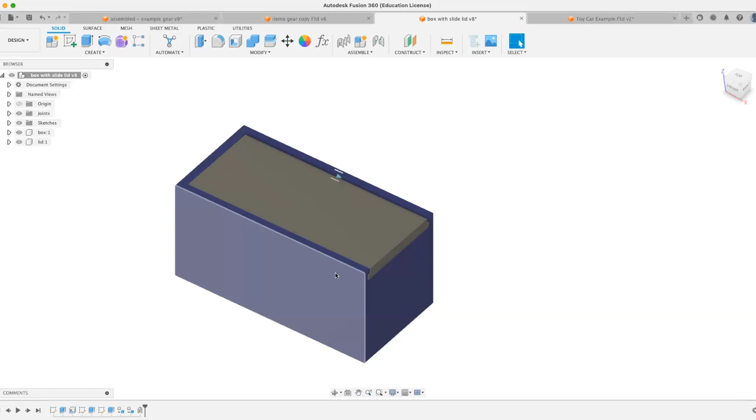One more thing to look forward to, which is what our next webinar is going to be: what if we wanted to render and animate these? For example, what if I want to make this box look like wood, like a product sitting on a shelf in a store, and have an animation where the lid slides on and off? That's what the next webinar will be about, because in addition to the design window, which is where we spent our whole time tonight, we also have the animate window and the render window where we can make models look extremely realistic. That's something we'll be talking about in our next webinar in the new year.

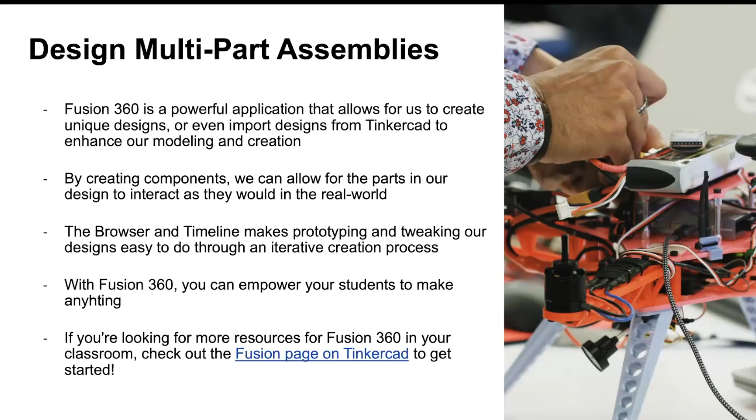Something else that's super cool for all of my secondary educators is that you can obtain a Fusion 360 certification through Autodesk Certifications. That's either you as a teacher, if you want to become a certified Fusion 360 user, or your students—if they're applying to colleges, they can get these certifications and put them on their applications to show they're certified in this CAD program. Autodesk has this for a number of CAD programs, not just Fusion 360, so I highly recommend checking it out—it's a really worthwhile way to gain credit for the skills you're learning.